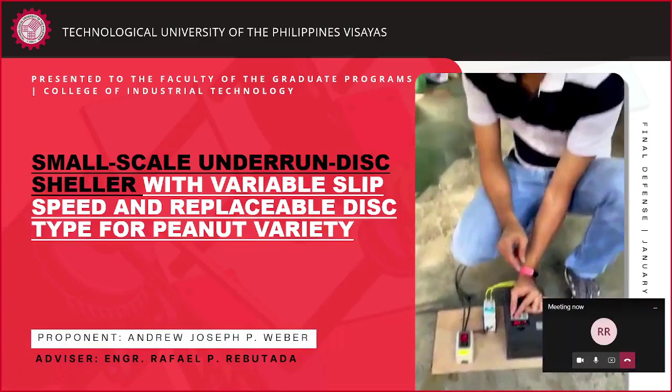The title of my study is shown on the screen, and this is a sample video of the actual shelling operation.

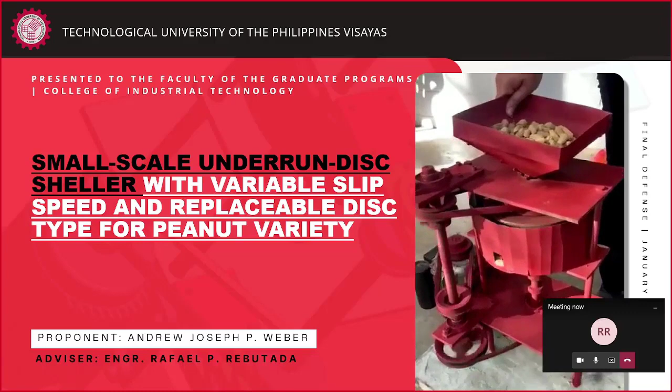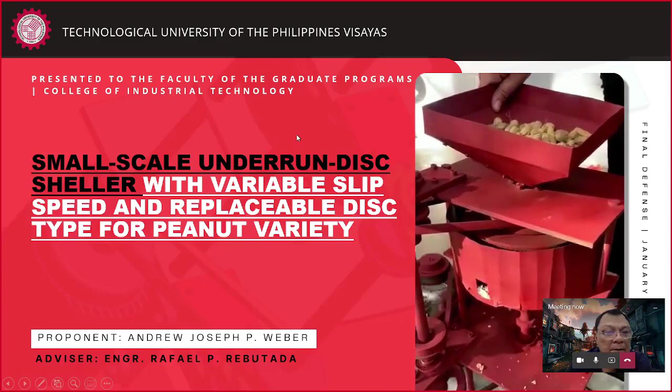Excuse me, Mr. Weber, did you copy the email? Try again, please. Okay sir, wait sir. I have no headphones, so is my audio clear now, sir? Yeah, Mr. Weber, you may turn off your video first so the audio is louder. What about ma'am now? Is it okay now, ma'am? Yes, it's okay. Okay, so let me continue my presentation.

Let's recall the research topic and the technical issues. There are different dehusking equipment such as steel huller, rubber rollers, and underrun disc sheller.

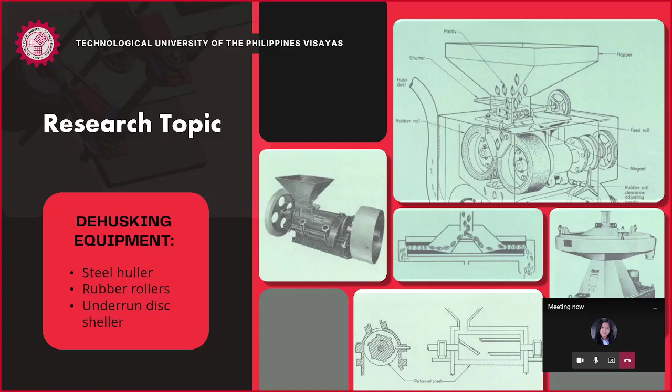My study was focused on a small development on the underrun disc sheller. Even though these technologies were originally designed and used for removing husks in small grains, there is no reason not to extend or adopt these technologies in other food crops and determine their effects.

For the underrun disc sheller, it has two basic parts: the horizontal disc, the upper part and the lower part. The upper part is fixed, and the lower disc part is the one that rotates. The two discs are covered with abrasives.

This technology is very simple in operation. It has low running cost, and the abrasives are very inexpensive and can be made or remade on site. Those are the advantages of this technology.

But the main disadvantage of this technology is that it produces high grain breakage and causes abrasion to the outer bran layer of the grain.

The basic mechanism of this technology is that after the grains are fed onto the top, they start to move radially outward because of centrifugal pressure developed between the two discs, and the work of friction created between the interfaces of the grains and the abrasives causes the removal of the outer part, which is the husk.

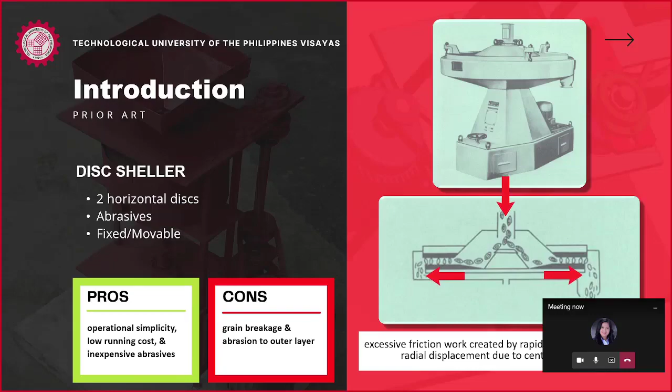Again, the main disadvantage is that it causes too much grain breakage and abrasion to the outer bran layer of the grain. So the proposed solution is to allow the upper part of the disc to rotate as well. In doing so, you can regulate or down-regulate the amount of work of friction developed between the interfaces while maintaining enough centrifugal pressure or force to keep the food crops moving radially outward.

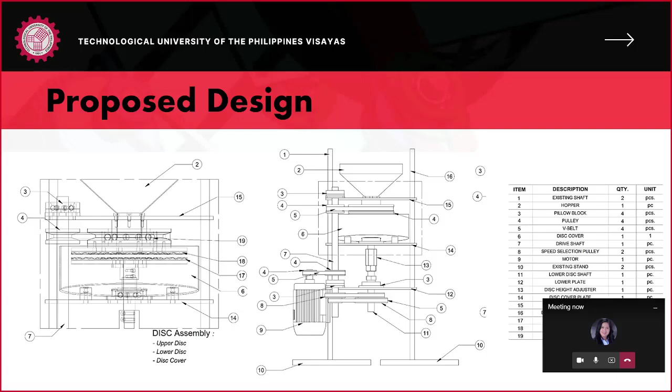So it was the general objective of this study to develop a small-scale underrun disc sheller with variable slip speed and replaceable disc type for peanut variety.

The specific objectives were: first, develop an underrun disc shelling technology that minimizes seed breakage percentage by providing a variable disc speed that regulates centrifugal effect. Second, fabricate the system with the following components: top and bottom rubber disc housing, two induction motors, control unit, collection box, and a pedestal.

Third is to test and improve the project prototype by determining the effect of clearance, slip speed, and peanut variety on the performance indices of the sheller. The last is to evaluate the acceptability and/or performance of the project prototype.

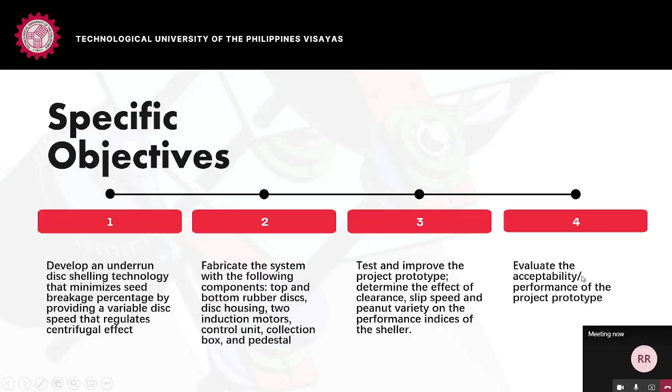The methodology began by purchasing a 3.5-month-old Padpad variety from Libertad Marketplace in Bacolod. The ground nuts were cleaned, any defective or damaged pods were removed, and they were then solar dried for 2 to 3 days. The initial moisture content was measured by a standard AOAC official method using a binder ED series drying chamber.

During the experiment, the two variables that were manipulated are the lower disk speed and the clearance, each with two levels. For clearance, there are 3.0 cm and 2.8 cm. For lower disk speed, there are 30 Hz and 35 Hz produced by the VFD, the variable frequency drive, or 15 RPM and 9.67 RPM in the lower disk rotation.

The data were analyzed using Minitab 18 with a 2x2 full factorial design.

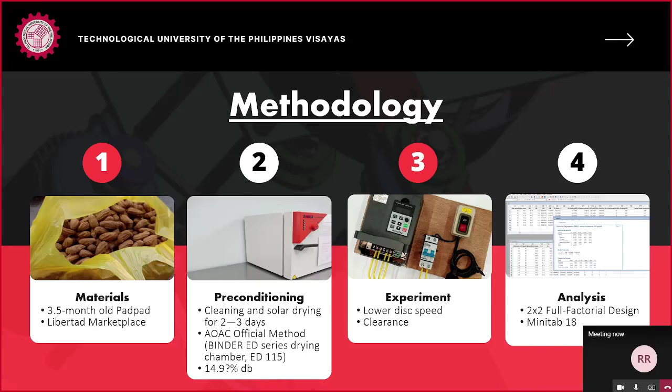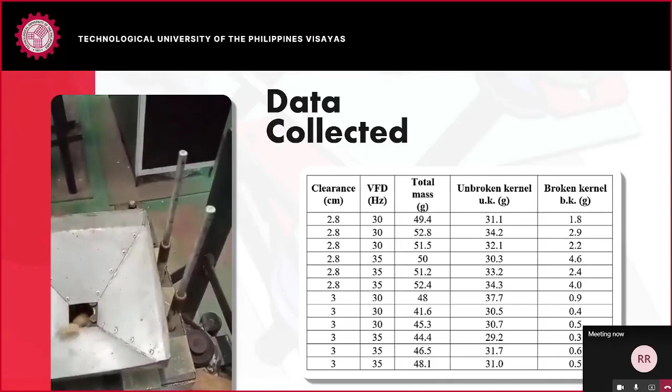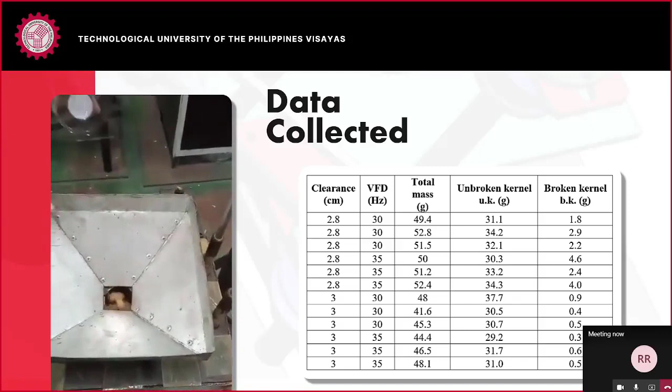This is a sample video again of the actual testing, and the data collected is shown on the screen, arranged in standard order tables showing clearance and VFD values: 2.8, 30; 2.8, 35; 3, 30; and 3, 35. The data gathered were total mass, unbroken kernel mass, and broken kernel mass.

Let's go now to the research findings or results.

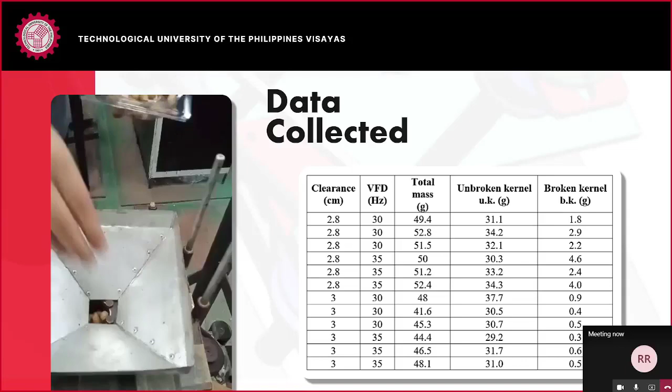A summary of descriptive statistics is shown in Table 5. We have the feed, the unbroken kernel, the broken kernel at 3.0 and 2.8 clearance, and lower disk speed of 15 RPM and 9.67 RPM. We can observe quickly that the best result can be achieved using a clearance of 3.0 cm, and it doesn't matter much whether you use low speed or high speed.

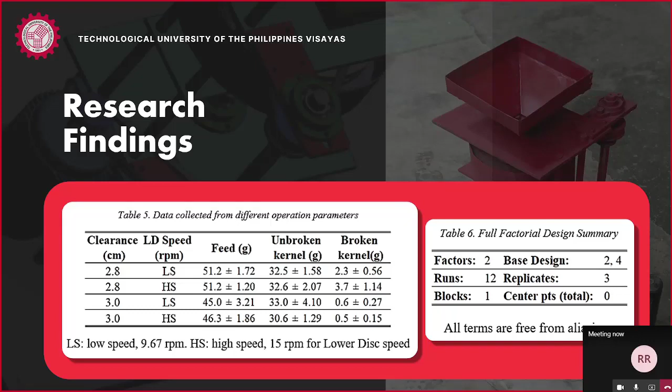Table 6 is a summary of the full factorial design. We have two factors, each of which has two levels, for a total of 4 different experiments. Each experiment has 3 replicates, for a total of 12 experiments or 12 runs. All terms are free from aliasing, which just means that the design is a full factorial design with no confounding terms.

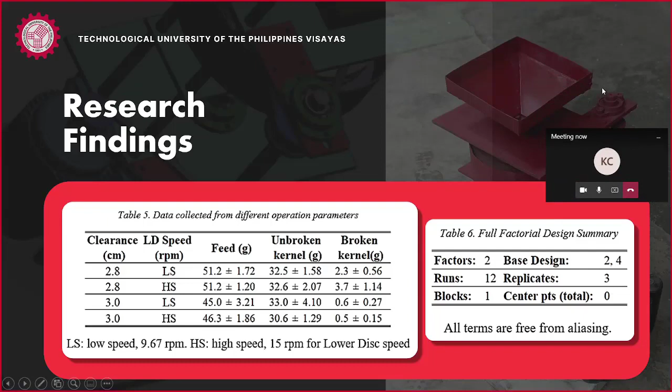Analysis of variance was also included in the data analysis, and results showed that the analysis of variance for DE, decortication efficiency, and PKD, percent kernel damage, are identical, because DE and PKD sum up to 1 or 100%. The data showed that only clearance is highly significant among the two variables at alpha of 0.01.

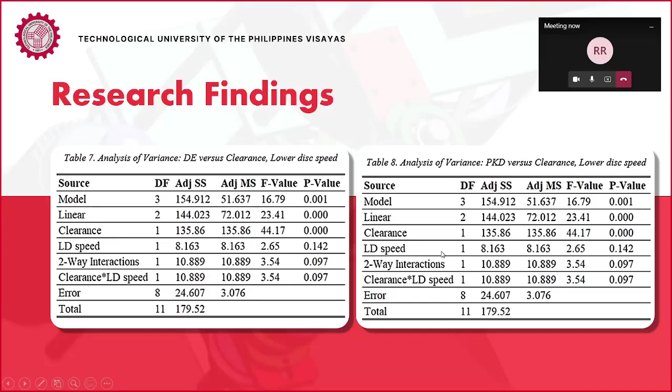Another way to present the data is by using Pareto charts. In this figure, we can see that factor A, in both DE (decortication efficiency) and PKD (percent kernel damage), is the only factor that is significant, because it is located on the right side of the vertical dashed line.

The gray bar indicates a positive effect, and the black bar indicates a negative or decreasing effect. So clearance's effect on decortication efficiency is that it increases the efficiency, while the same factor has a negative or decreasing effect on percent kernel damage, and that is good. We have to increase DE and reduce the damage.

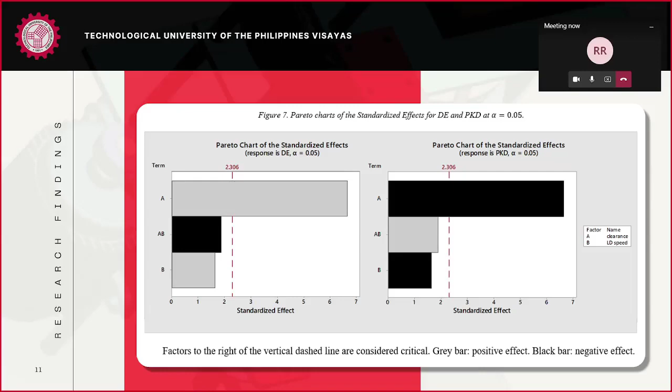For the response surface contour plot of DE and PKD, we have on the y-axis the lower disk speed and on the x-axis the clearance. It can be shown here that if you operate at 3.0 cm clearance, the choice of lower disk speed is very trivial, because you can see the dark green area, where the decortication efficiency is greater than 98% at 3.0 cm clearance.

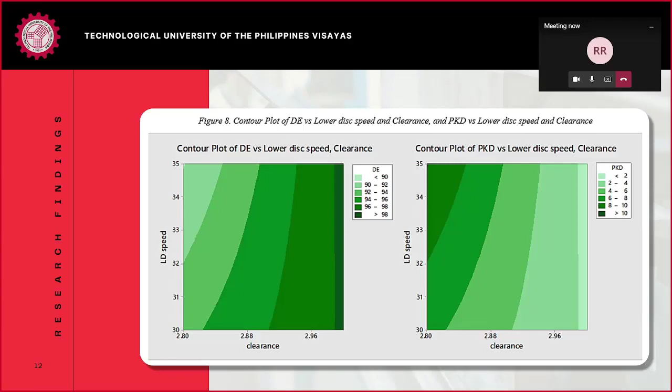The same is true with percent kernel damage. If you operate at 3.0 cm clearance, it doesn't matter if you use low speed or high speed, your percent kernel damage is less than 2%. But it can also be shown here that there is an interaction effect between the disk speed and the clearance, because the contour is curved. It has a curvature.

So this is now the summary of the results. Different studies from different researchers are included for comparison. Their statistics are represented in bold numbers, while the result of my study is represented in normal case, and they are placed alongside.

All researchers used ground nut except Oluwole, that's why we have NA for Oluwole. The reason I include Oluwole is for reference purposes of the indices that were used, which are the percentage effective cracking and the percentage of breakage. So all researchers used ground nut, Oluwole used shea nut, so they are not valid for comparison. That's why the result is NA for Oluwole, but I have the results there using the statistics or formula by Oluwole.

MT is the total mass of ground nut or feed. MUK is the mass of unbroken kernels. MBK is the mass of broken kernels. And MUNS is the mass of unshelled seeds, all after operation.

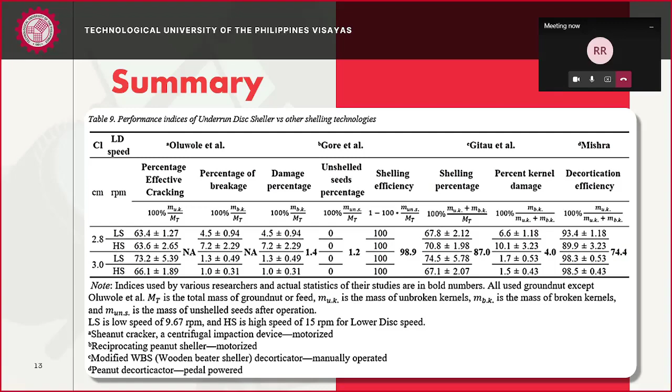So in conclusions: clearance is the single biggest factor that contributes to an increase in the decortication efficiency and a reduction in percent kernel damage. At 3 cm clearance and high-speed, lower disk speed, 98% DE and 1.5% PKD were achieved. Effect of lower disk speed within the range that was operated is insignificant.

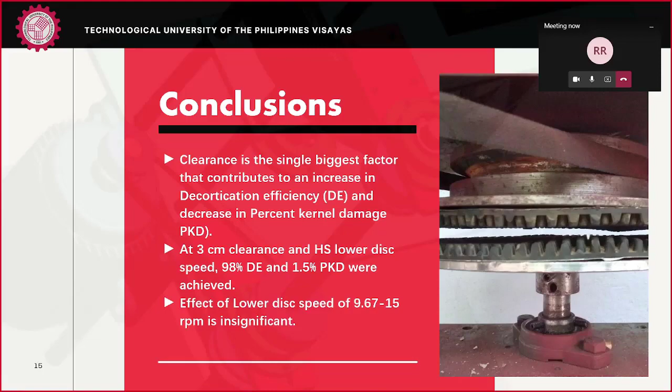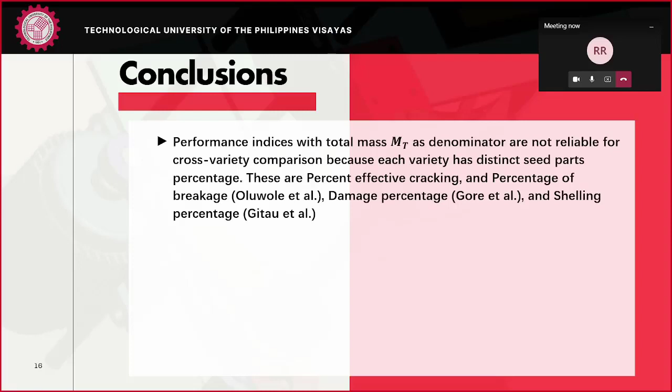Next, performance indices with total mass as denominator are not reliable for cross-variety comparison, because each variety has a distinct seed parts percentage. These are percent effective cracking, percentage of breakage, damage percentage, and shelling percentage. So they are not really valid for cross-variety comparison.

Unshelled seeds percentage and shelling efficiency by Gore can be used to gauge the performance of shelling operation, since it refers only to what proportion of seeds were shelled or still unshelled relative to the feed after an operation. So these can be used to gauge the shelling efficiency of different technologies.

Next, only percent kernel damage and decortication efficiency are valid for cross-variety comparison, because it investigates the quality of the shelled kernels. So while unshelled seeds percentage and shelling efficiency are used to gauge between shelling technologies of different shelling efficiency, percent kernel damage and decortication efficiency can be used to gauge the quality of the shelled kernels.

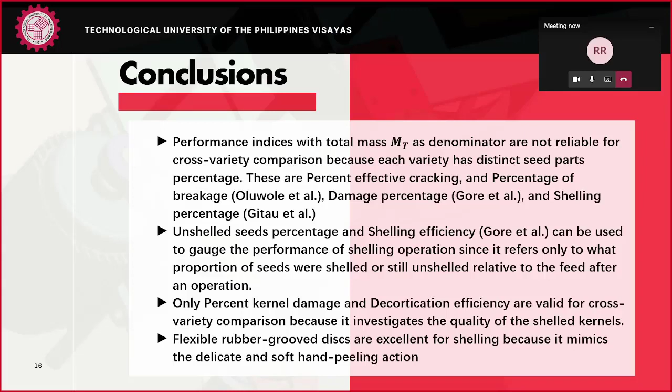And the last conclusion is flexible rubber grooved discs are excellent for shelling, because they mimic the delicate and soft hand peeling action. So that would be all. Thank you for your attention.